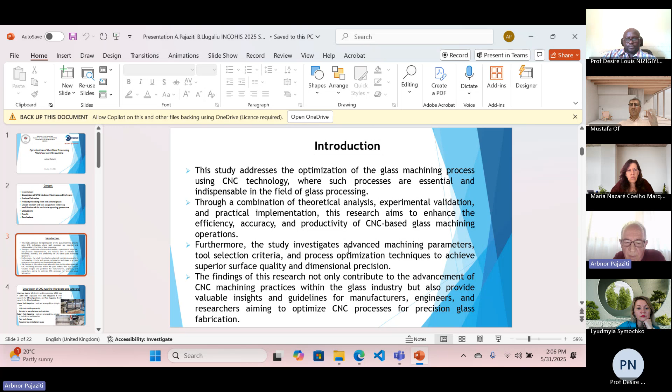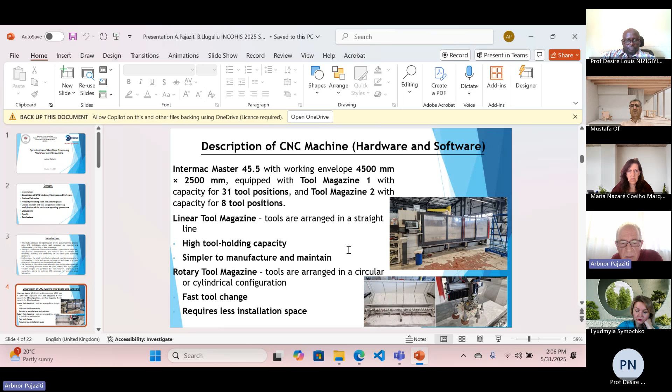Here you can see two pictures with regard to hardware. There is a big factory producing glass for international cooperation companies. In the first picture, you can see the Intermac Master 45.5 that can process a big plate. You can also see the dimensions of it. So there are two pictures.

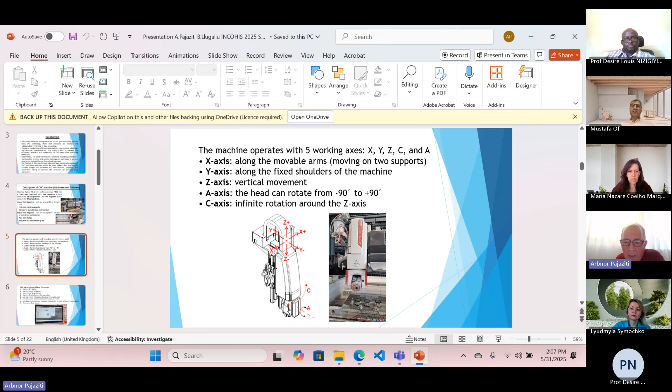I'm going to continue. We have focused on the operation of these machines. This machine contains 5 axes: X-axis, Y-axis, Z-axis, C-axis, and A-axis. Each of them plays a role, so we can see that this is a kind of manipulator, a robot manipulator.

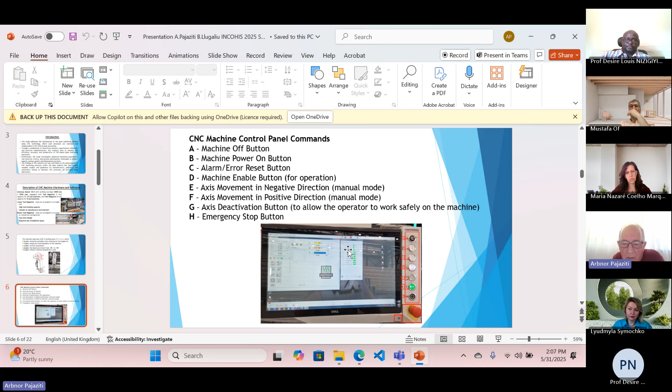If we talk about the hardware, the connecting part of hardware is the software. The machine control panel commands are given in this slide. For each button, there is a certain command you can activate for different actions. Further, there is a teaching pendant, or so-called handheld pendant, so you can do the commands manually, and afterwards memorize all those commands. It depends on what you are going to process, in this case the glass.

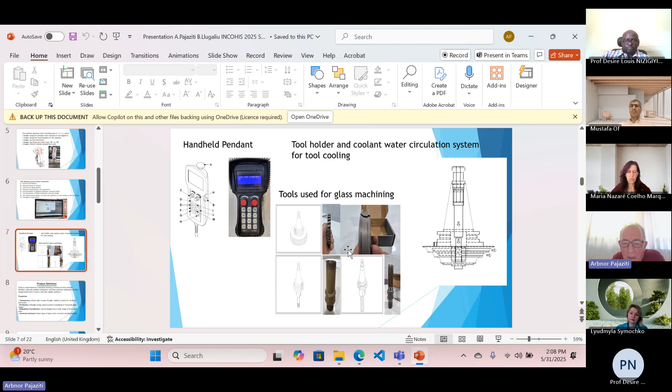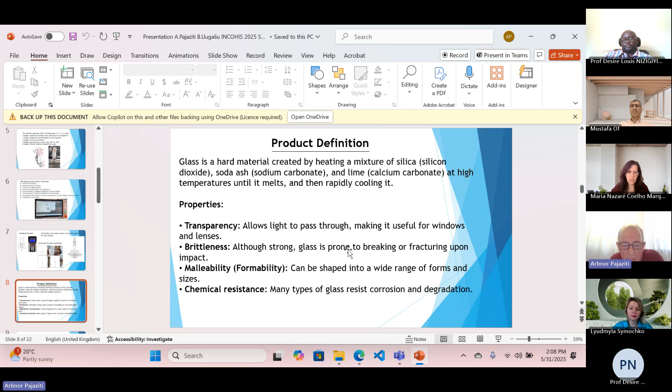Further, we continued with product definition. If we talk about glass, it is a hard material created by heating a mixture of silicon dioxide, soda ash, and lime at high temperature until it melts, and then rapidly cooling it. The properties given here of the glass are its transparency, brittleness, formability, and chemical resistance.

Execution of the machining process uses the machine's existing condition, without modification of operating parameters. What we have done here is that all the processes for going to the final phase are already known in advance. So we just gave the parameters to the machine, CNC machine type Intermac Master 45.5. When we talk about the machine software for creating glass, we use ICAM 2D, two dimensions, since the glass is a plate, meaning X and Y.

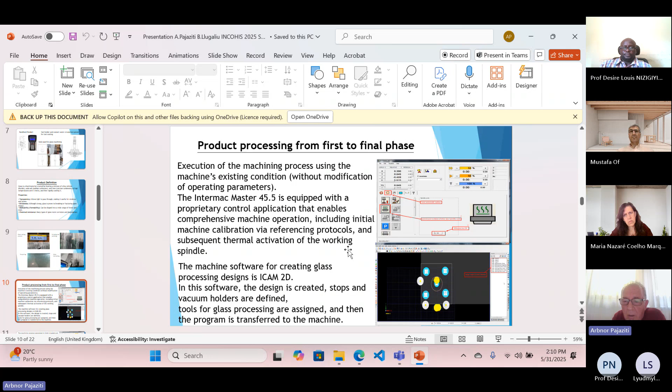The machining program generated in ICAM is loaded and selected to the machine interface. A verification process is conducted to confirm the correctness and suitability of the tools assigned during ICAM programming. The operator specifies the glass thickness along with the total quantity of material to be processed, ensuring machine parameters are properly set for accurate and efficient operation.

Placement of stops and vacuum holders was also part of the process, followed by initiation of the machining process according to the sequence of tools assigned in ICAM. This software is used for operation, and everything has been defined in this software interface. The processing time for this operation is 10 minutes and 30 seconds.

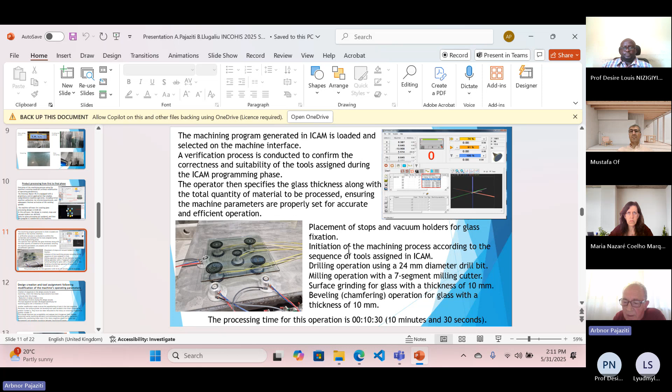Further, we did design creation and tool assignment following modification of the machine operating parameters, creating sequences in the design process for glass machining. The following improvements were achieved after this change. Our purpose was to reduce machining time while keeping the quality that could be achieved with the older methods.

Another modification made involves the repositioning of tools in the tool magazine. Previously, the surface grinder and beveling tool were located in the linear magazine at position number 6. They have been relocated to the rotary or revolving magazine at position number 37.

By making these changes, we obtained results that influence efficiency and minimize downtime during operation.

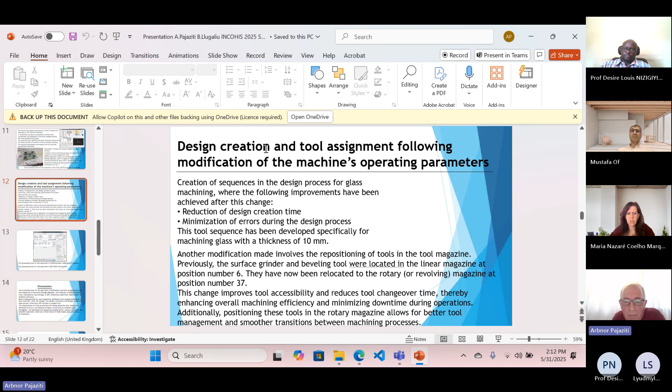In this slide, you can see the creation of sequences in the design process for glass machining, where improvements were achieved after this change. We updated results, and the processing time for the operation before and after grouping into the set is illustrated through diagrams.

The reduction in design creation time, expressed as a percentage, is 20%, indicating a significant improvement in workflow efficiency. Before implementing the tool sequences, 48 designs were produced during an hour. After the change, we obtained 60 designs, an improvement of 25% increase in productivity.

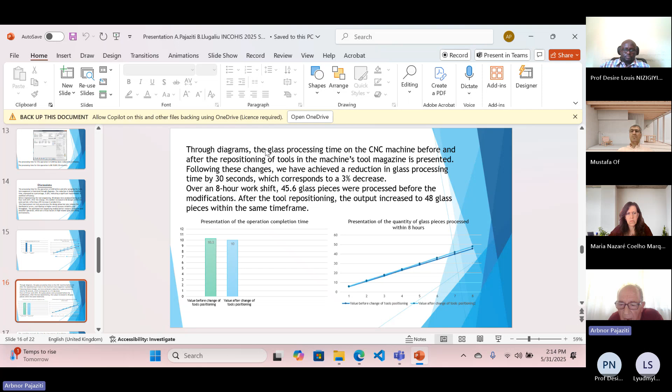You can see this within 8 hours, or one work shift. Here are two other diagrams regarding operation completion time within one shift of 8 hours.

This is our original work. Here is the algorithm, the step-by-step process of machining a glass piece. I'm not going to describe it in detail. On the right side, you can see the machine and the glass that has been cut. You see the circle in the middle of the glass.

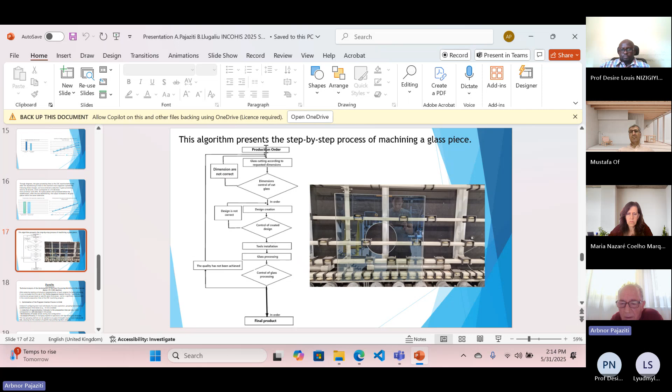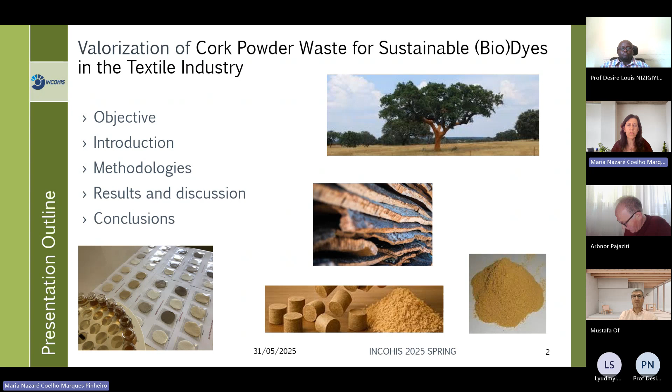I will start my presentation presenting the motivation and objectives of this study. Then I will introduce the methodologies we used, the main findings, and at the end some conclusions and remarks.

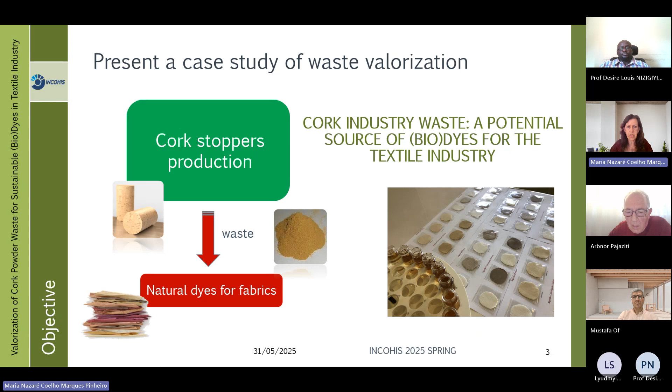The main objective of this work is to assess whether the cork powder that comes from the cork industry, particularly from the manufacturing of cork stoppers, the main waste or byproduct obtained, can be valorized as a source of biodyes for textiles. These principles align with circular economy and sustainability principles, so I present this as a case study of waste valorization.

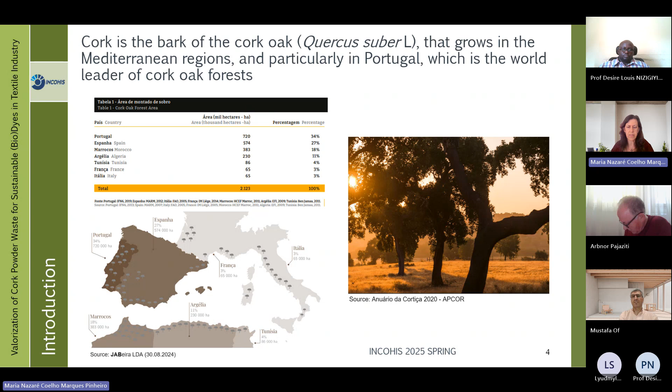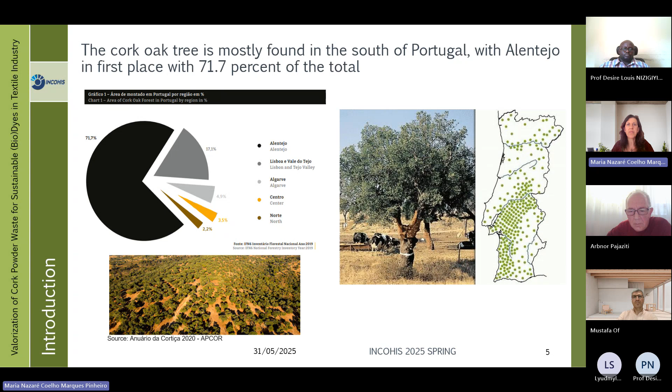In Portugal, these fields of cork oak trees are called montados, as shown in this picture. They are located essentially in the south of Portugal, particularly in the Alentejo region, where 71.7% of the montados are located. This part of Portugal is very dry and hot in the summer, so this kind of tree develops very well there.

The most important product of the cork sector is cork stoppers, and the wine industry is the main sector that retains cork products. As shown in this graphic, almost 73.5% of cork products go to the wine industry to make natural or technical cork stoppers.

Nowadays, the construction sector also has a good position, with 24.1%.

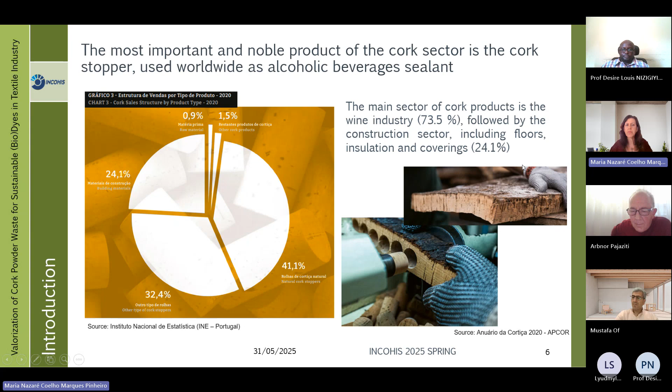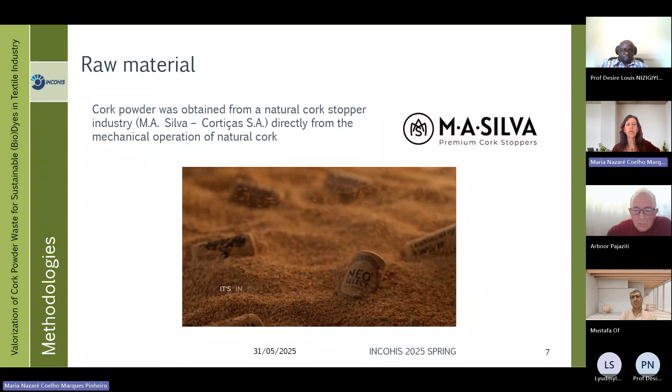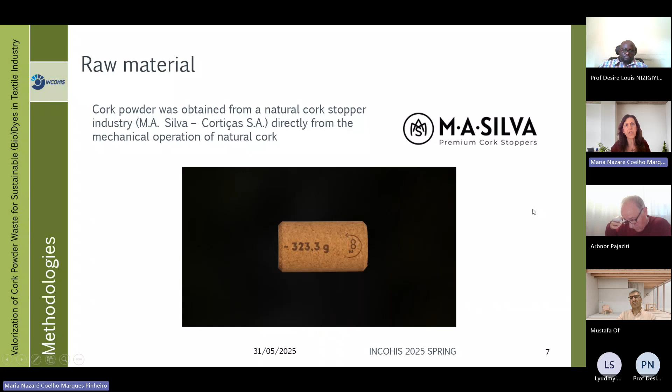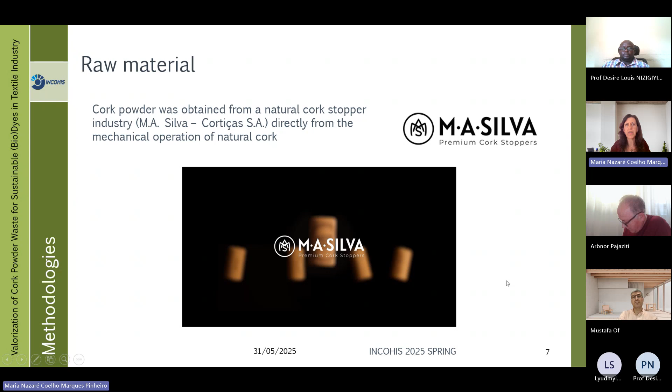The raw material used in this work was obtained from a local factory, M.A. Silva Cortiças, and the cork powder was obtained directly from the mechanical operation of natural cork. It's important to say that care was taken to avoid contamination with chemical products usually used in the production of technical cork stoppers or during the final phase of surface treatment.

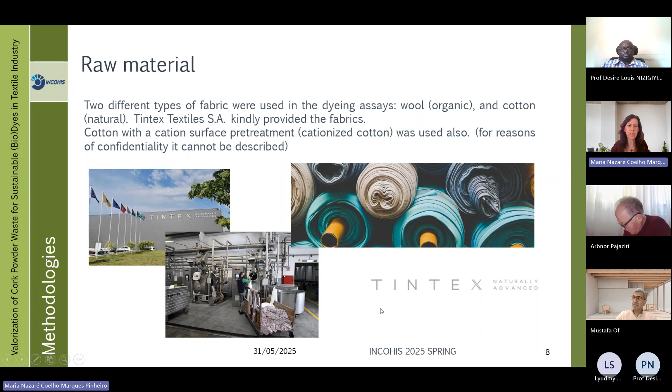The other raw material used in this work was fabric, and we used two different types: organic wool and natural cotton. These textiles were kindly provided by a partnership enterprise from the north of Portugal, Tintex S.A. We also used natural cotton with pre-treatment on the surface with cations, which we call cationized cotton, but for reasons of confidentiality, I cannot describe the cationization process.

The main methods started with the extraction of the biodyes or coloring compounds. We made a solid-liquid extraction with water at two different temperatures, 30 degrees and 100 degrees at boiling stage.

We also used different amounts of cork powder, at concentrations of 5 grams per liter, 10 grams per liter, and 20 grams per liter. These extractions were made under agitation during 3 hours, and during this time we took small samples every 30 minutes to evaluate the dye extraction efficiency. These samples would later be analyzed by spectrophotometer analysis.

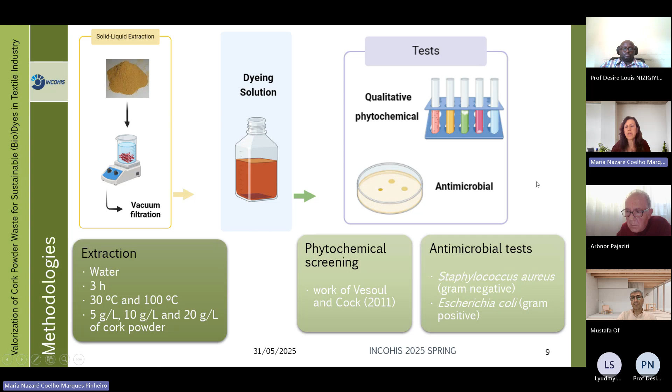At the end of the extraction, the solution was filtered under vacuum to obtain a clear dyeing solution. This dyeing solution was also used to evaluate the phytochemical constituents, and we made antimicrobial tests to evaluate the activity against 2 bacteria, 1 gram-negative and 1 gram-positive.

But in fact the main experiment was dyeing the textiles. We dyed the textile in triplicate during 100 minutes at 50 degrees under agitation. I must mention that parallel to the dyeing samples, we also used a control we call blank, which followed the same steps but used water instead of dyeing solution.

After the dyeing process, to evaluate color fastness we performed washing tests and light exposure tests. For the washing tests, we made 2 steps: one with cold water at 20 degrees for 10 minutes, and then the dyed samples were washed with water at 45 degrees for 10 minutes.

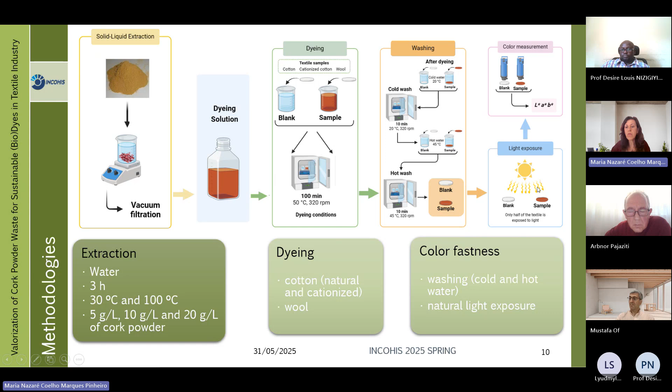To evaluate color fastness by light exposure, we distributed all the dyed samples on a plate, and they stayed for 1 week exposed to natural light, with half of the surface protected by a dark curtain.

After 1 week, we measured the final color in the tissues using the CIELAB color system. For this system, we measure 3 coordinates, L, A, B, giving lightness, red-green, and blue-yellow respectively. From these coordinates we calculate a parameter called delta E, which represents the difference between 2 colors.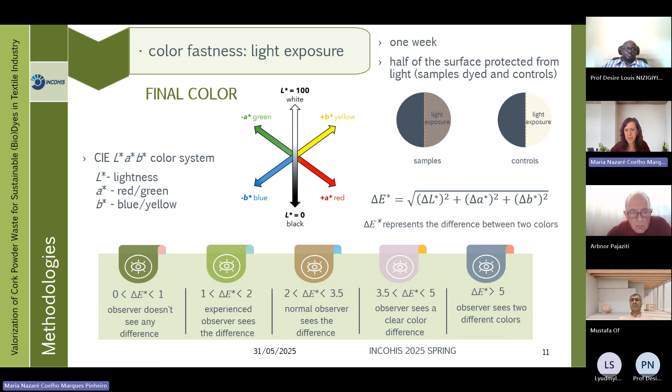A bigger parameter represents more distant colors. We calculated this parameter between the dyed sample and the blank sample. The magnitude of delta E represents how we can perceive the color difference, and I should emphasize that parameters greater than 5 mean we have two different colors. We have this in our results.

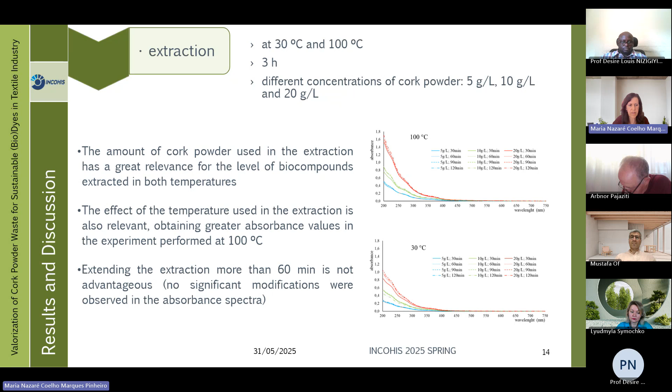Another interesting conclusion is that although we made extractions lasting 3 hours, after 60 minutes the difference in the spectra is not significant, so it's not advantageous to extend the extraction further.

As I mentioned before, we also measured the antimicrobial activity of the coloring solutions. Unfortunately, we observed that the extract did not inhibit the growth of the two bacteria, because we did not observe inhibition zones after incubation of the diffusion plates.

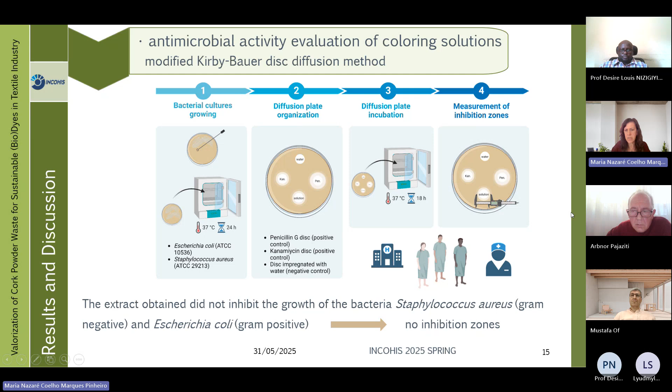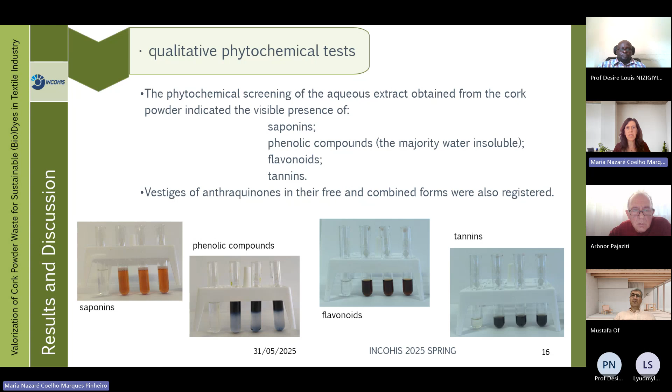We also made phytochemical screening of the extracts, and we noticed the existence of different compounds, for instance saponins, phenolic compounds—majority insoluble to water—flavonoids, and tannins. Usually this kind of compounds are associated with coloration and antioxidant properties.

In which concern the colors, we can see in these three graphs where all the results are represented that we obtain different colors in all the situations, because all the parameters delta E are greater than 5, meaning that when comparing the color of dyed sample with the blank, it represents a different color. This is the first conclusion. Also we can see that the coloration is more intense when we use cationized cotton, which clearly shows that the incorporation of cations in the surface of the fibers results in better dye fixation, and so the resulting color is more intense.

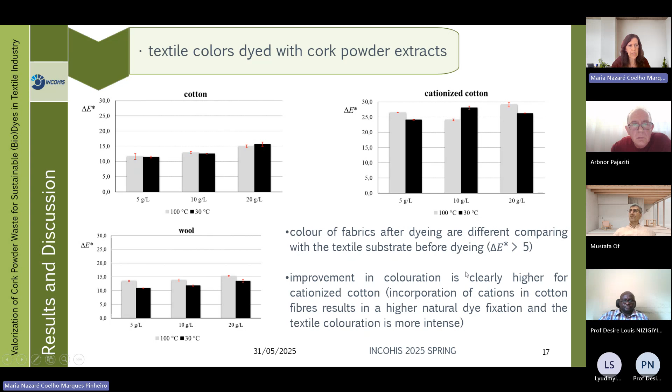In general, the value of delta E is also greater when we use greater amounts of cork powder in the extraction, and also greater temperatures.

In order to check and observe the real colors that we obtain in the fabrics, we transformed the measured LAB coordinates to RGB coordinates, and we reproduced here in these squares the real colors. As you can see, in all the conditions used, at 100 degrees or 30 degrees in the extraction, we have beautiful earth tones, and this indicates that our waste can be valorized with success as a biodye.

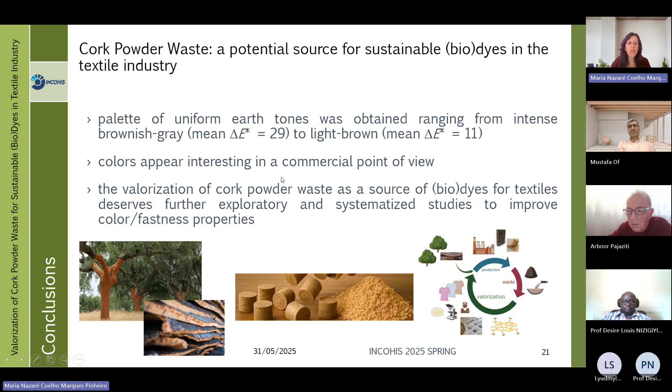As final conclusions, I can say that these earth tones, ranging from intense brownish gray to light brown, are very interesting and have commercial potential. Additionally, the colors obtained in the samples are very uniform, which is very good for the consistency of the results, although we must continue our research to improve mainly the color and the fastness property.

I would like to finish my presentation by saying that I'm very grateful to the enterprises involved in this project, mainly Tintex Textile, because it supplied the substrates but also technical assistance. And I'm very grateful for this opportunity to share my results.

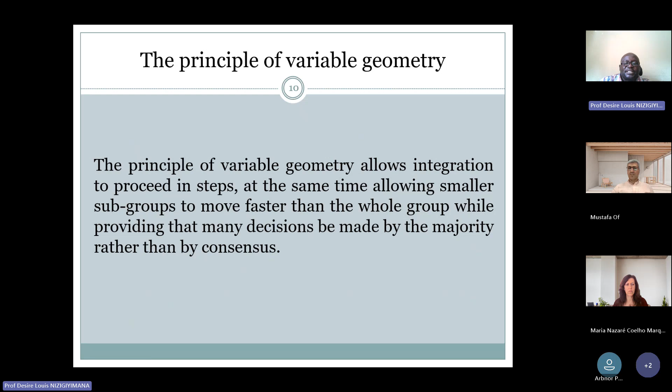This principle of variable geometry may allow some countries who may be going faster in integrating some principles and protocols to go on their own rhythm, while allowing others to go in more slowly, but at the same time trying to integrate the whole process.

The principle of subsidiarity provides the basis for distributing powers and responsibilities across the several layers, from the national level to the regional level of this organizational structure of the regional integration scheme, according to the comparative advantage in respect of different functions.

At the level of decision making, this is also very important because this principle allows people involved in these countries to have a say in the decisions being made at the governance level.

There are some added values which this model based on these two principles may bring out. This will be a model of cooperation which gives room to coordinate national initiatives, and there is an increase in democratic values which may come with this kind of model of cooperation.

The East African Community is also claimed to be a people-centered organization, referring to the Treaty of 1999. But this domain needs to be much improved in order to externalize this value, because it seems in the protocols and the way the community is moving, there is much needed advancement at this level.

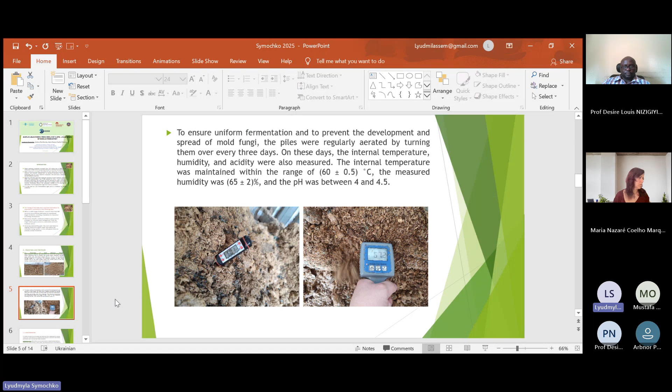The next stage was sample preparation. For further research, the test sample was divided into 3 subsamples to examine whether visual differences in fungal mycelial inclusions could affect fermentation performance and, consequently, biogas production.

Our next stage was determination of total solids and volatile solids in the spent mushroom substrate samples. Volatile solids measure the total organic matter content of the feedstock and are often used to assess specific biogas yield and biogas production. This measurement is essential for assessing the effectiveness of the anaerobic digestion process carried out with those 3 subsamples of spent mushroom substrate.

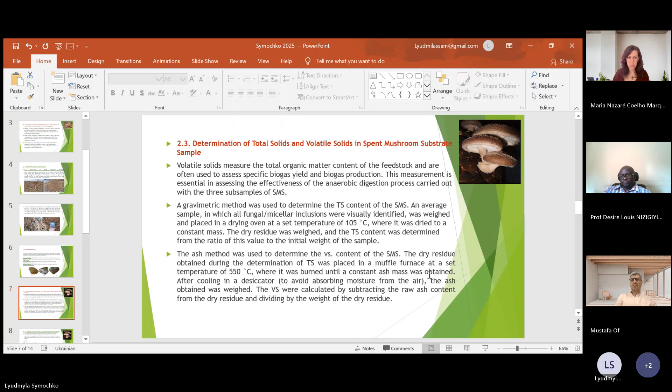The next stage of our study was digestion of spent mushroom substrate samples for biogas production. To evaluate the biochemical potential for biogas production, the three subsamples described before were introduced separately into reactors, each with one repetition, resulting in a total of 3 repetitions for the substrate sample.

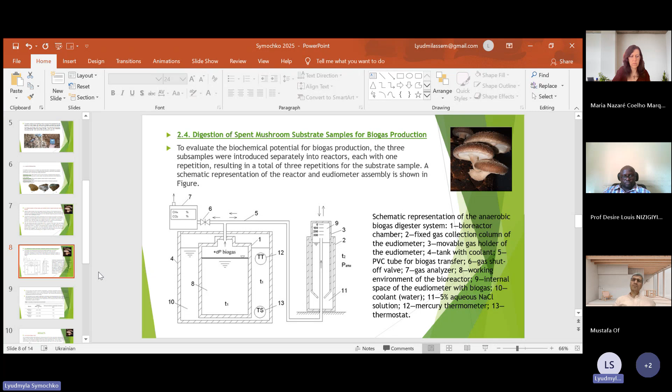For the study of the three separate subsamples, a periodic mesophilic fermentation regime at 36 degrees was chosen, with an initial average concentration of organic matter of the substrate mixed with the inoculum. The fermentation period of the experimental mixtures was 38 days. As inoculum, they used an organic suspension containing a starting population of a methane-generating consortium of bacteria and archaea, capable of restoring metabolic activity when the fresh substrate was introduced.

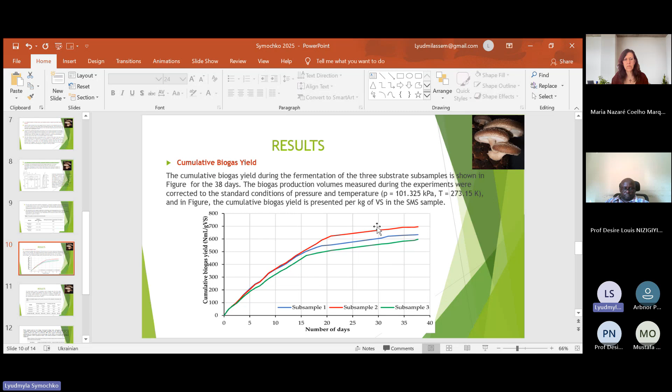So we had pressure of 101.325 kilopascal, and temperature was 273.15 degrees Kelvin. Here you can see cumulative biogas yield presented per kilogram of VS in the SMS sample, for subsample 1, subsample 2, and subsample 3. As we can see, the highest results we got with subsample 2.

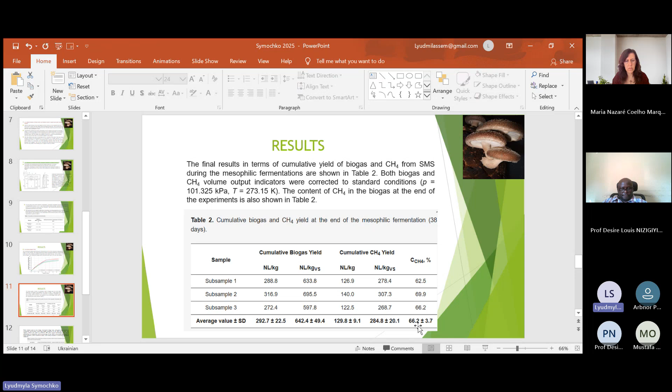So the highest percentage of methane was at the end of the fermentation process for subsample 2, 69.9%. But generally, the medium value was 66.2% of methane. So it's quite high productivity.

And of course, we know that plant residues such as corn silage, straw-grain silage mass, and grass silage present comparable performance concerning biogas production. However, SMS offers several advantages such as its availability, its composition, and its processing. In fact, spent mushroom substrate is a byproduct generated in large quantities and often considered as waste, so readily available in mushroom cultivation industries.

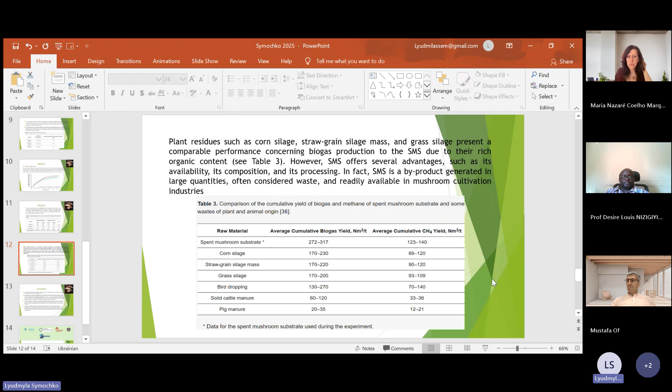So our conclusions: the study conducted to evaluate the potential of reusing SMS as a feedstock for biogas production showed promising results. Experiments of anaerobic digestion were performed using SMS directly without pretreatment, in the mesophilic regime, over a period of 38 days.

The results showed that average biogas yield was 292 normal cubic meters per ton, with a methane concentration of 66.2%, making spent mushroom substrate a strong renewable energy source.

Biogas production is most effective during the first 15-20 days of fermentation, after which it decreases. And spent mushroom substrate is a competitive biogas source compared to other organic waste materials, as we showed in the previous table. Its methane yield exceeds that of traditional livestock waste, like cattle manure, poultry manure, and so on.

The use of SMS for biogas production offers significant economic advantages to agricultural and energy sectors, including cost savings and waste disposal. This approach also promotes the development of a circular economy by converting waste into energy, thereby reducing the environmental pressure associated with waste management.